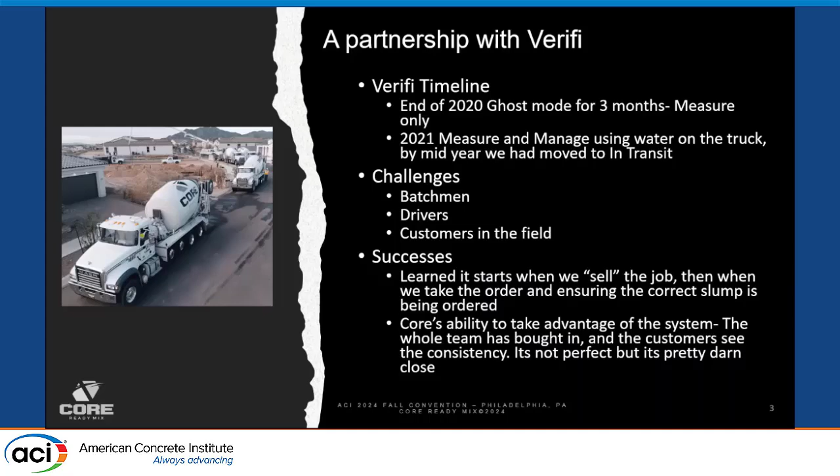The biggest success we've had, the biggest thing we've learned, is it starts when we sell the job. It starts when our salesmen are out there talking to our customers about making sure they order the correct slump. It's that simple. We then follow that up with the order takers to make sure that they're really talking about slump. Basically, I have one mix. You can order it in 3 different slump ranges. It's the same mix.

Like I said, when we started this, it was kind of just go for it. Bull in a china shop. I didn't really give anybody a chance to say no to it. We just went for it. Ken Riley, our Verifi rep, we needed his help guiding implementation, best practices. All of our senior management bought in, sales department bought in, dispatch bought in.

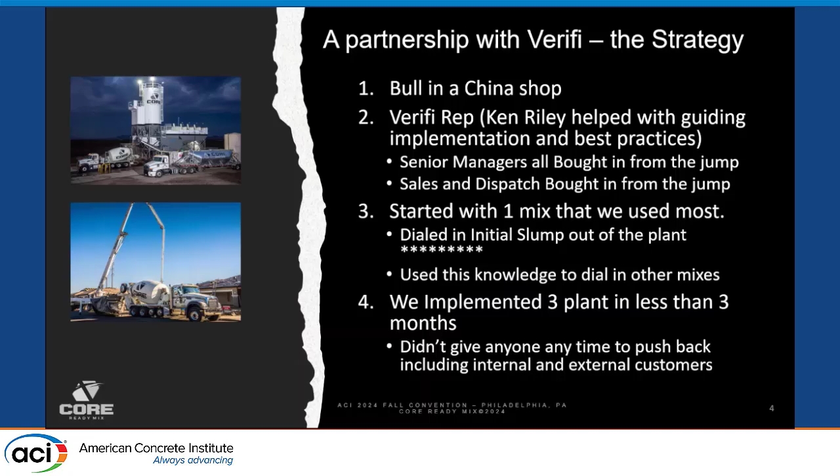Big thing was dialing in the mixes out of the plants. You actually saw my data earlier. You can see once you get the water correct, everything gets better right away. There is some variability when it comes to aggregates. That's the other thing we've learned over the years. It can make a big difference. We implemented 3 plants in less than 3 months, and we've been on it ever since.

Again, dialing in the mixes started out with just asking the batch guys to tell us when they're holding out too much water or adding water. Once we got that right, life got easier. Want to talk about the amount of data you get with one of these systems? It's endless. Our management team digs in when we're looking for opportunities for improvement.

The conclusion that each one of the team has figured out: for the batchmen, ensuring that the loads are going out at the correct slump, they're very competitive, right? We post that once a week. They get to see the percentage of their loads that are correct. They don't want to be the last guy. They want to be the first one.

The drivers, ease of use, right? My drivers now have figured out it's really easy to drive that ready mix truck, to be safe, to do those things, maybe not so much focus on that slump anymore. And then accountability. They'll keep each other accountable. Customers, consistency. If you can produce the same concrete when it comes to workability and flowability and finishability time and time again, they love it.

Time savings, right? We're really able to compact our day. I'm sure everybody in here that is a producer understands that everybody wants concrete at the same time. So the more efficient you can get there. And then ease of use. We've made it really simple on both ends. And then sales and dispatch efficiency, time cost savings.

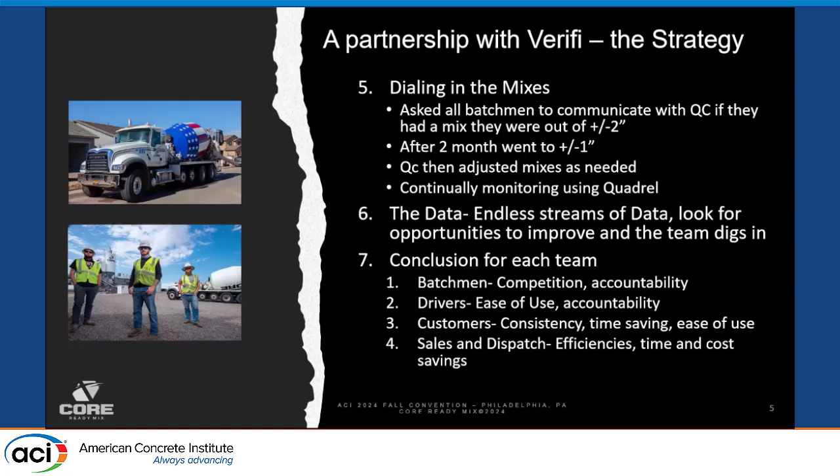When it comes to actually setting up the instructions to get Verifi to do what we want it to do, it's kind of like ordering a vehicle, right? You go in there and you tell it what to do. I probably have 25 to 30 mix instructions, and each plant of mine is different on the mix instructions. I've had to learn that over the years. How to mix, when to add water, when to add admixture, how and when, and then the actual slump range you're looking for. So pretty simple.

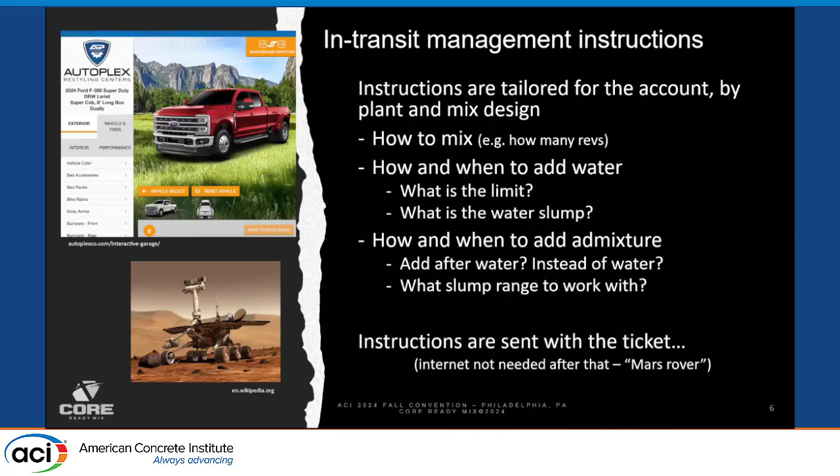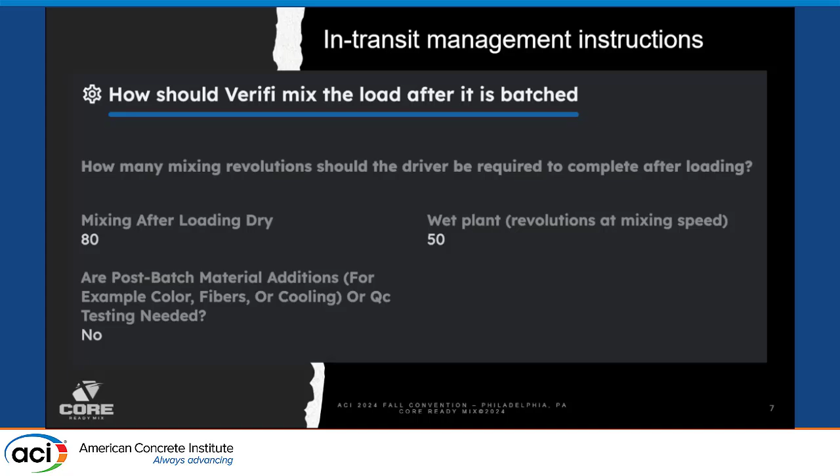You tell it how many revs after loading, whether it's a wet or a dry plant, and then you let it know if you need to add any material after loading. Ask about adding water. You can allow it to add water up to the designed amount of water in that mix. Pretty important to make that decision. If you allow it to add more, your variability goes through the roof. If you don't allow it, for us, we're trying to produce concrete where we know what's in that load of concrete 100%, and it's working.

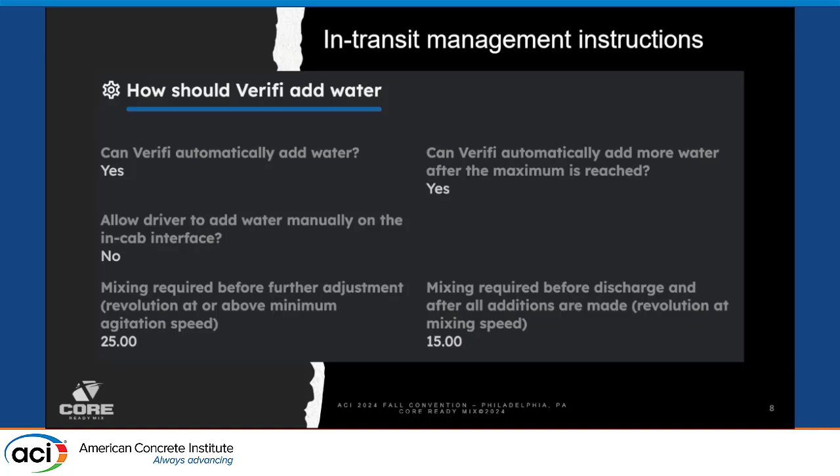And then you also tell it how many revolutions it needs. If you get out to site and the customer has ordered the incorrect slump and needs to bring it up, you need to know how much mixing time that needs. And it can be very different from mix to mix. Can it automatically add admixture? Yep, pretty simple. Another big one is the amount you want it to put in per yard to make the change of slump. That can change from time to time. Aggregates are typically the change there, or a change in cement can cause some problems. Then the maximum amount: we put one in, so if it goes above that, it's a flag for us to say we've got a problem.

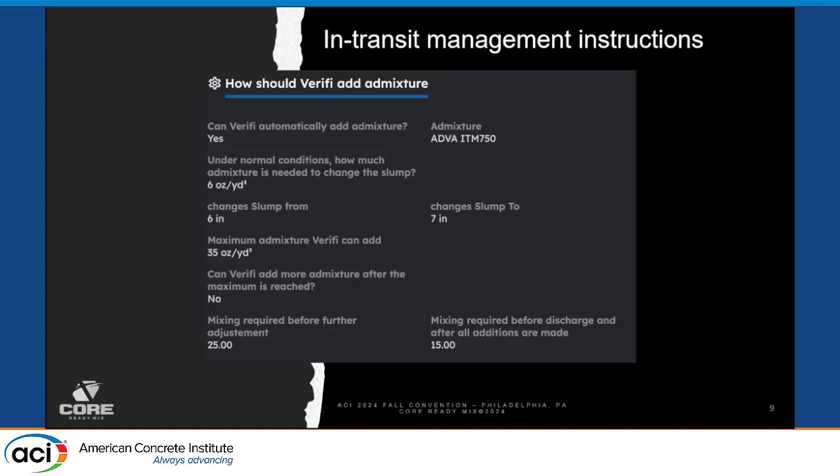And then the drivers, when they get on the job, if the customer tells them to add water, my guys don't even know what that means anymore. They literally got to tell them they want a different slump. And if the customer wants a higher slump than that mix is allowed to do, my drivers have to tell the customer, call into dispatch. At that point, we can typically fix it for the customer, but we've at least started the conversation, right?

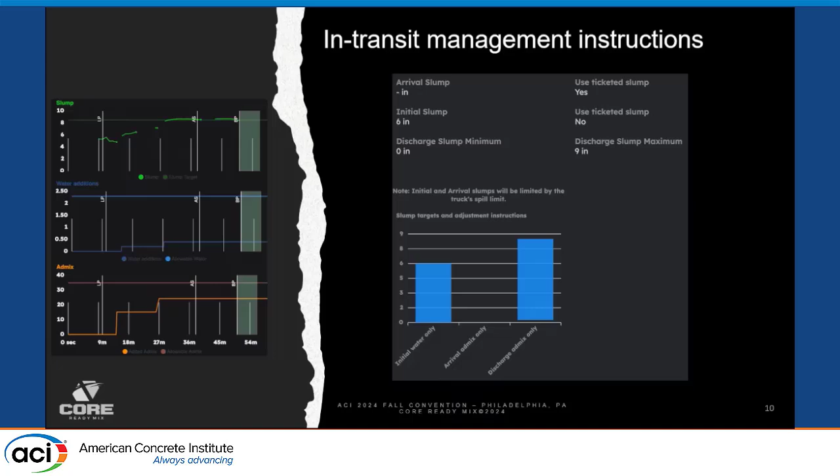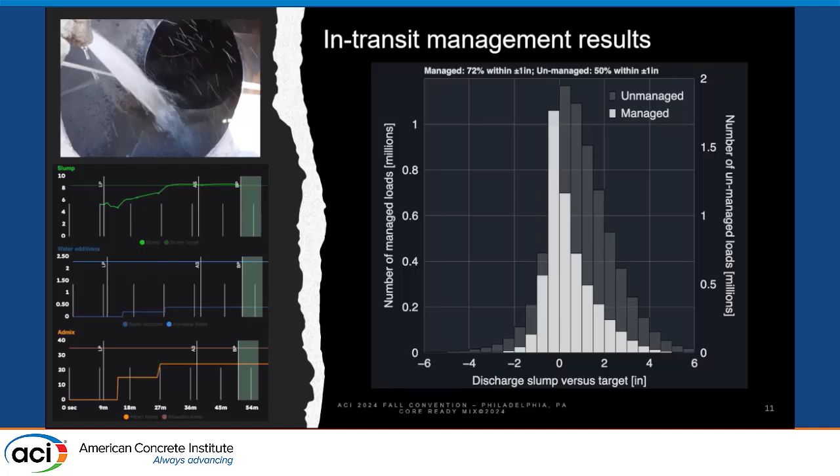Anybody that's been in this industry had a customer that orders a 5-inch slump and is pouring a 9, right? It's happened to everybody in here who's done this. Again, we can fix it on the back end, but the conversation gets started. So, again, just how the admixture and stuff goes in. You can see on this one a little bit about the discharge slump versus target.

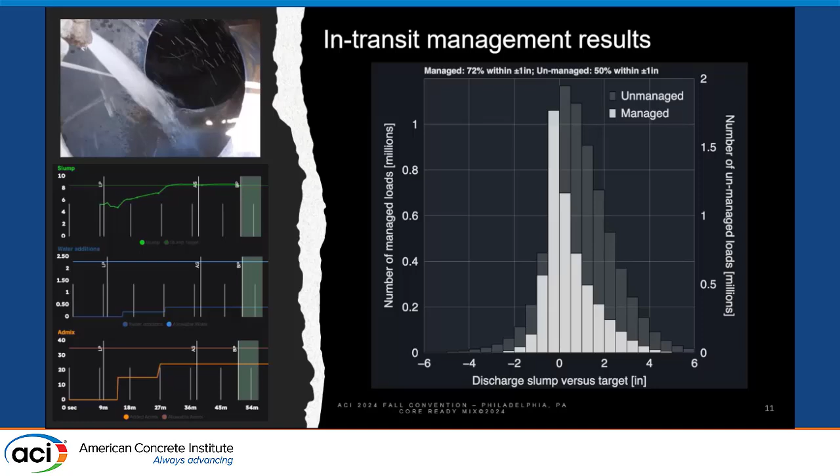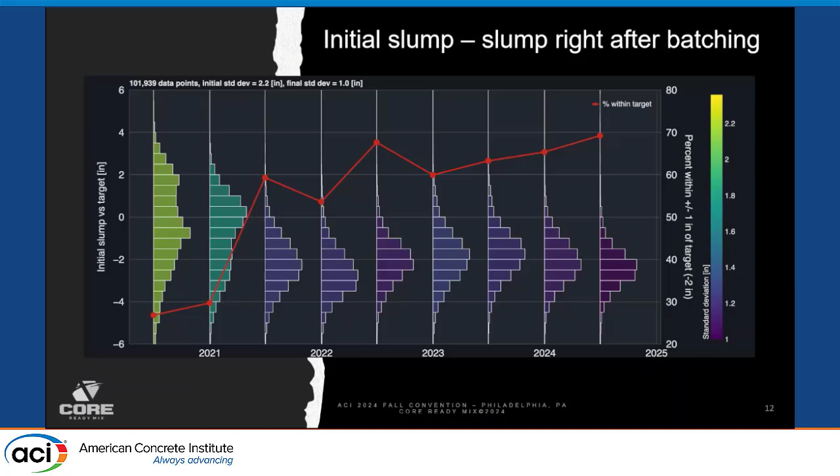So again, the other thing we've learned over the years is, I think I brought this up last year as well, coarse aggregate moisture is so important, and we don't have a lot of good tools to use to measure that. I can tell everybody in here I'm using Polar Moist, and it's working. But your coarse aggregate moisture ranges in Phoenix for us on a hot day is 2.5%. And you multiply that out, that's 2.5 inches of slump. So it's hard to get that thing tight if you're not measuring that.

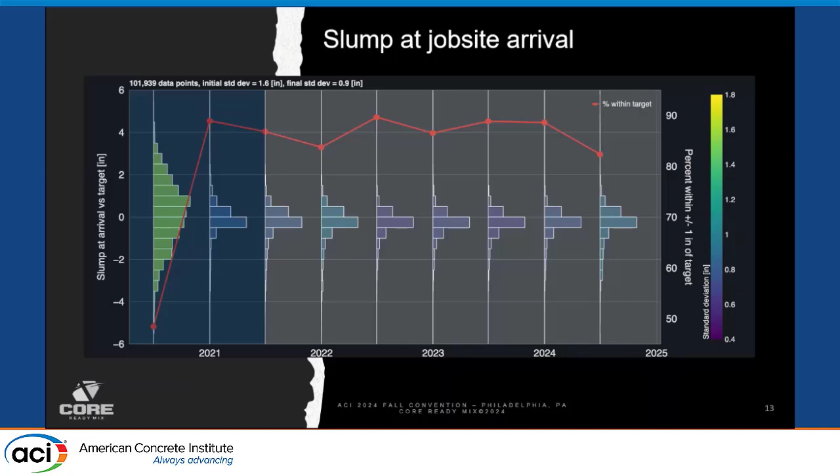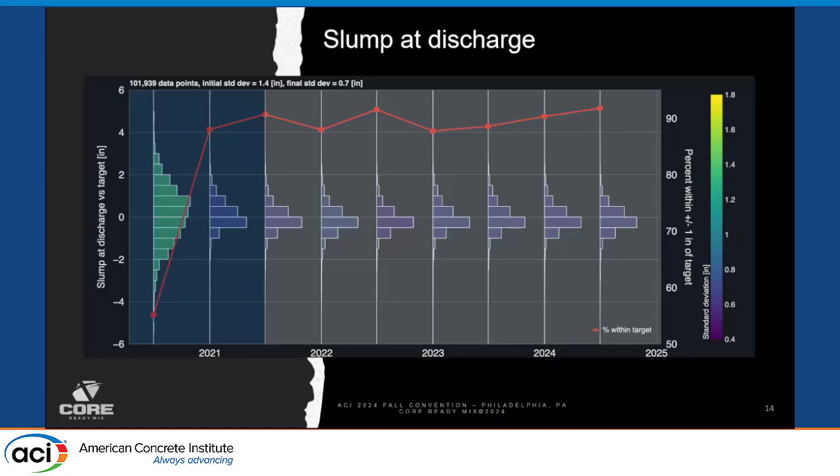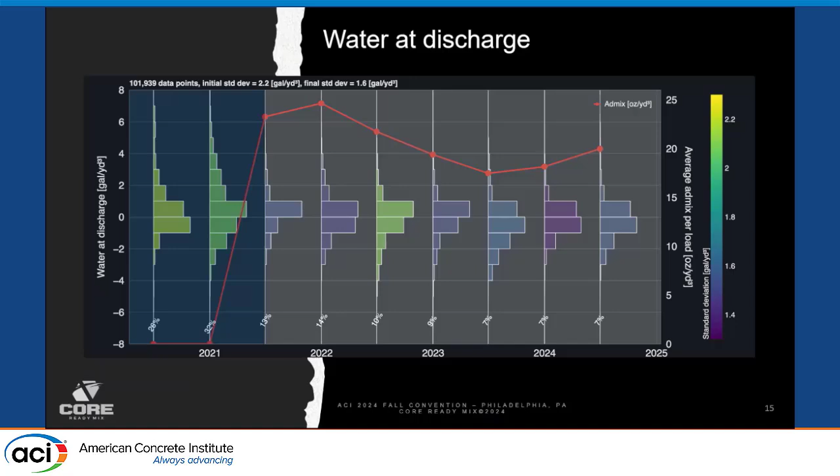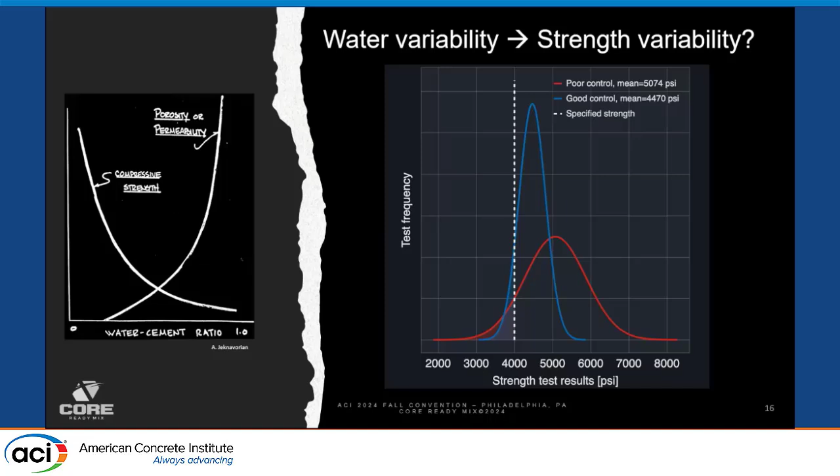This is a water variability versus strength. You can see on the left one, the poor control. The blue one is when we have good control over it. Strength and its variability. So 762 data points. You can see the white line is the strength. The next slide will correlate with pounds of cement. And then you see the variability in the strength.

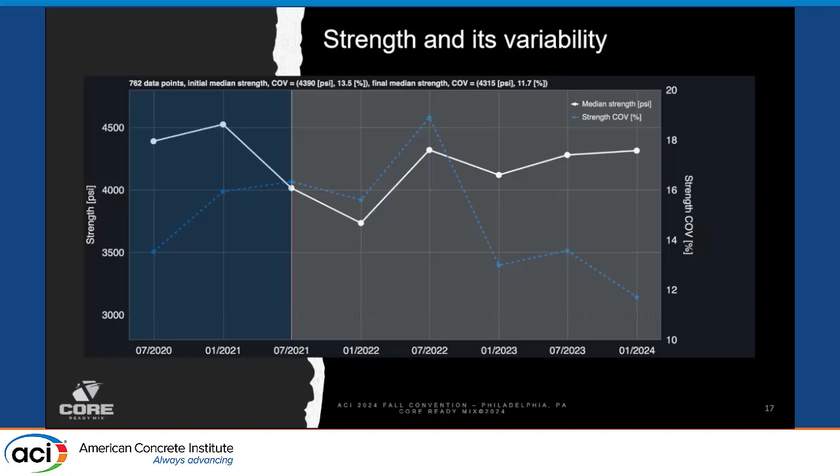Yep, so as you can see, we're lowering cement content, right? And our strengths are going up, which is not something you would typically think would happen, but our standard deviation is getting better and better as we go as well. We started at 440-ish, got all the way up to almost 450. We're down to 425. This doesn't have our most current data. We've pulled out another 10 to 15 pounds since. So we're continually lowering our cement content just by getting our standard deviation closer.

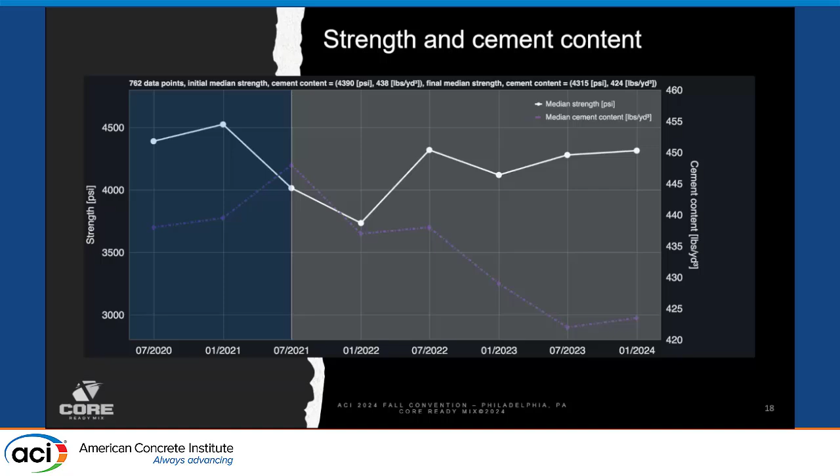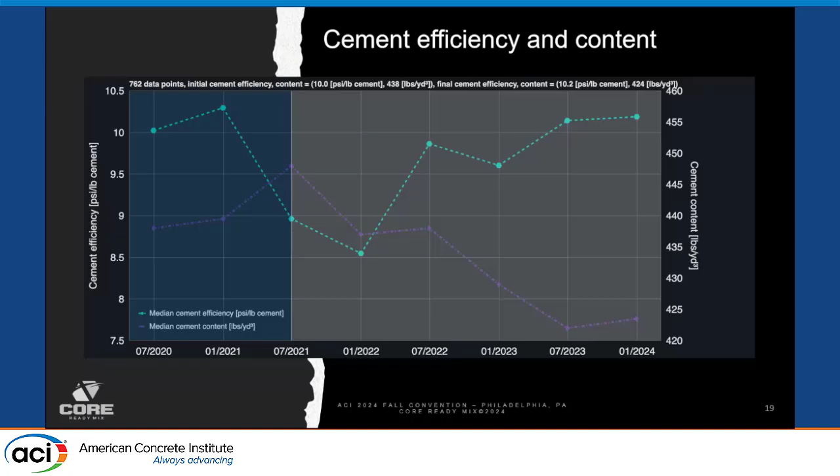This is cement efficiency versus cement content. Again, just by simply lowering that cement content, understanding exactly how much water we're putting in these loads, lowering all of those things, getting more consistent has helped us just be better. Last one, strength versus over-design. We're still over-designed, right? I keep pulling cement out, and we continue to be over-designed.

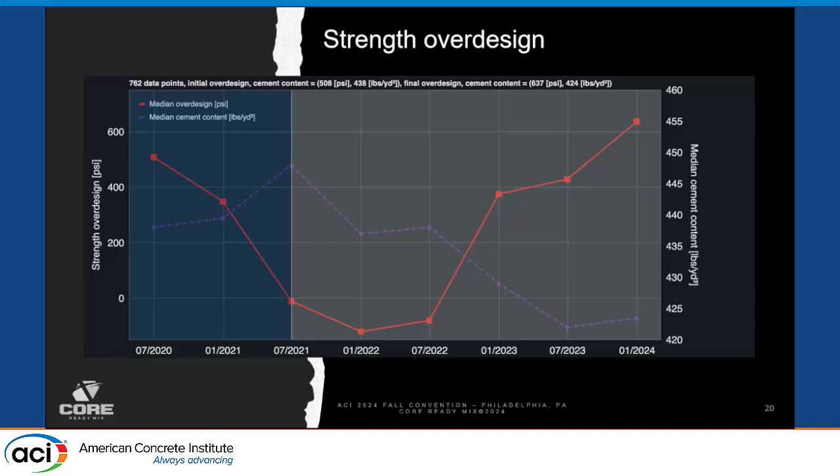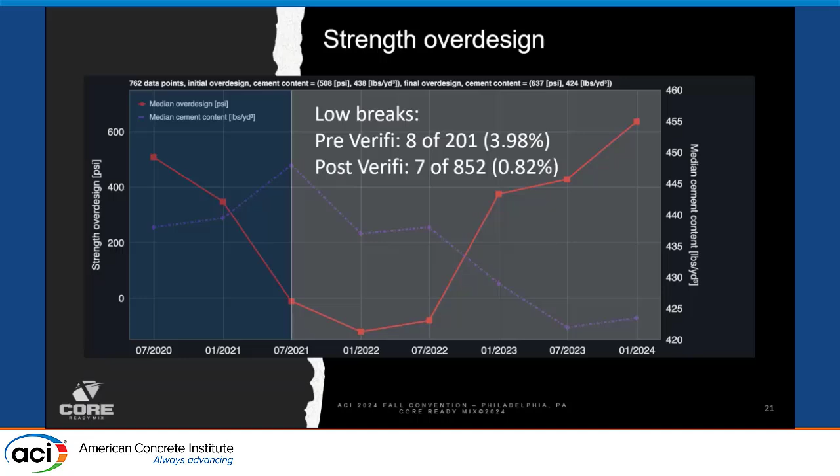There's always that little bit of a worry to the testing, which was talked about quite a bit in here today, as to how much you can truly pull out just due to the variability of testing. So something that I think needs to be looked at closer. If we take out some low breaks pre-Verifi, we're at almost 4% failure. Once you post-Verifi, we're at 0.82%, which is basically what ASTM ACI states you're going to have.

The other big thing here, right, with all that cement savings, the amount of CO2 we've reduced. So we're at 4 million tons, or 4 million pounds of CO2 and counting. That number will continue to go up for us. It poses some new problems that come with reducing cement, right? Now I've got finishability to start worrying about and pumpability as you start to lower this cement down and down.

This was one mix out of one plant, right? I've got 7 plants at the end of the year. So you can see my savings are through the roof. These things really work. They can be very consistent. And it really is about how you approach this and look at the data and keep digging into the data. So I think that's it.